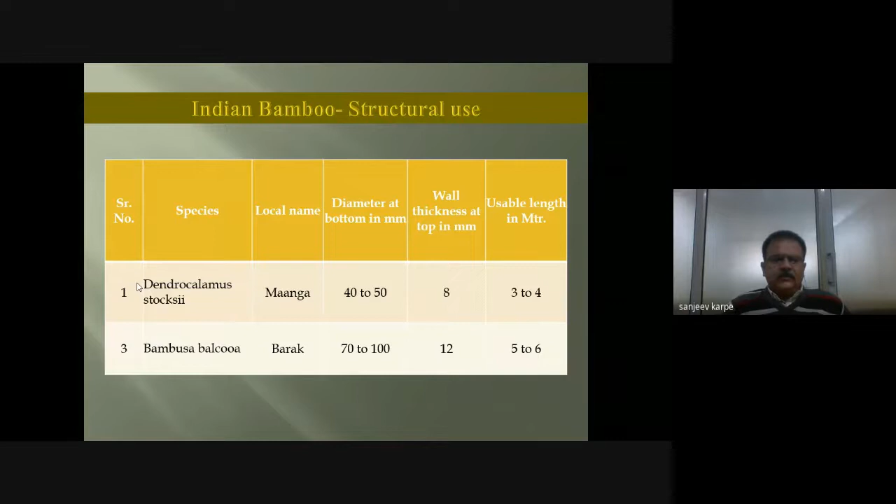So I will talk about these two particular species selected for construction and share our experience. Dendrocalamus stocksii is a fairly straight, good looking bamboo, solid at the bottom up to 2 to 3 feet, with usable length not more than 4 meters and diameter 40 to 50 mm. Bambusa balcooa has good diameter and wall thickness; it's not so straight, but with proper segregation you can sort out straighter poles for construction.

The first important thing about bamboo construction is grading of the material, because you need graded raw material for structural use. If you want good quality bamboo construction of international class, you should do grading, since not all bamboo is suitable for construction. Grading is done with respect to species—here I'm talking about Stocksii and Balcooa.

The age at which you cut bamboo is also most important. The age should be between 3 to 4 years. Diameter at the bottom should be minimum 45 mm and not less than that, and diameter at the top should be minimum 35 mm. Usable length should also be minimum 4 meters. Taper is also important—maximum 4 mm per meter length of taper is allowed.

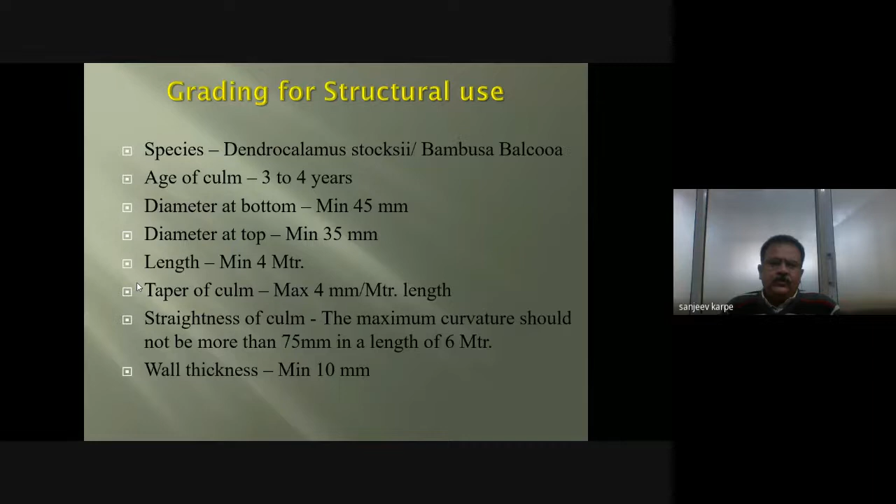If tapering is more, there are some limitations. Straightness is also very much important—maximum curvature should not be more than 75 mm in a length of 6 meters, and minimum wall thickness should be 10 mm. This is the basic specification on the basis of which you need to do grading before using bamboo for any good quality construction.

But once the same bamboo is dried, it's not possible to segregate it age-wise. So the most important thing is you need to segregate bamboo by age while it is still in green form.

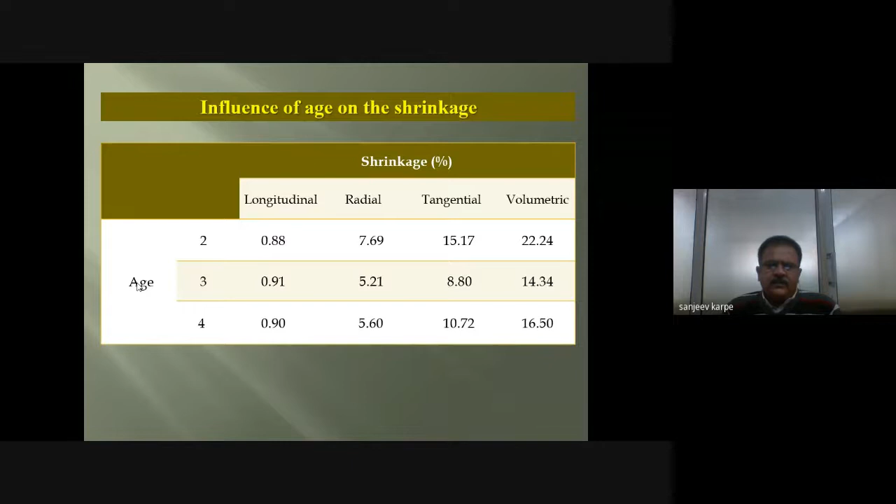About shrinkage—longitudinal shrinkage, radial shrinkage, tangential shrinkage, and volumetric shrinkage—you can see in this slide how shrinkage changes with age. So the influence of age on shrinkage is also very much important.

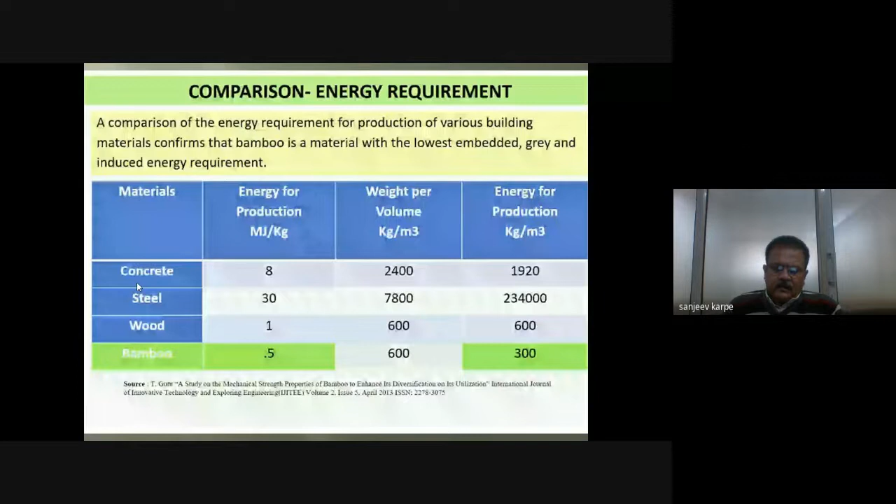Now, why bamboo? Because bamboo is one of the most sustainable materials on earth—you can call it a champion of sustainability. When we talk about energy for production and compare it with concrete, steel, and wood—energy for production, weight per volume, and energy for production per kg per meter cube—bamboo is the best bet, and compared with steel, it's a vast difference.

Species for bamboo construction: the IS code has included 16 species.

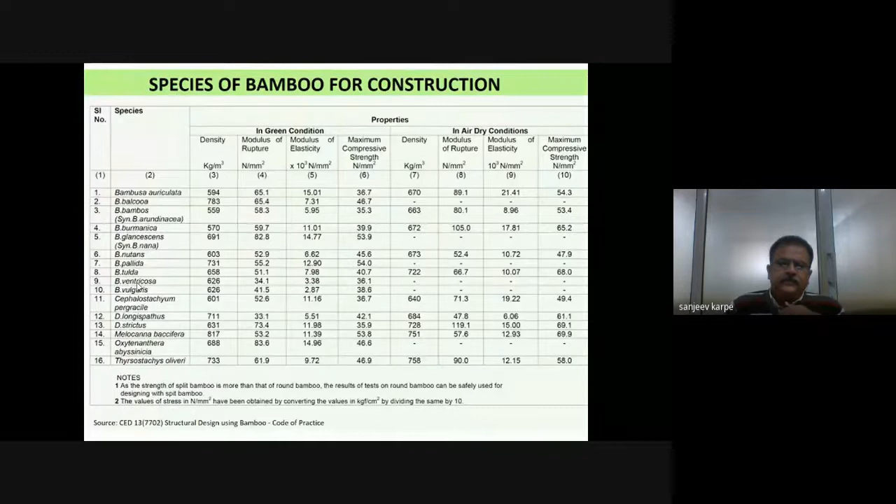About durability, bamboo on its own is not a durable material. You need to treat this material, and pressure treatment is the only reliable method where controlling quality is possible.

Bamboo consists of a lot of starch and sugar, and as long as starch and sugar is inside, some insect will come and eat it. Insects like borer lay eggs inside the bamboo even before you harvest it, so your enemy is sitting inside. The borer has a fantastic capacity to remain in a dormant stage for a long period, and hence you need to take care of your enemy by impregnating preservative inside.

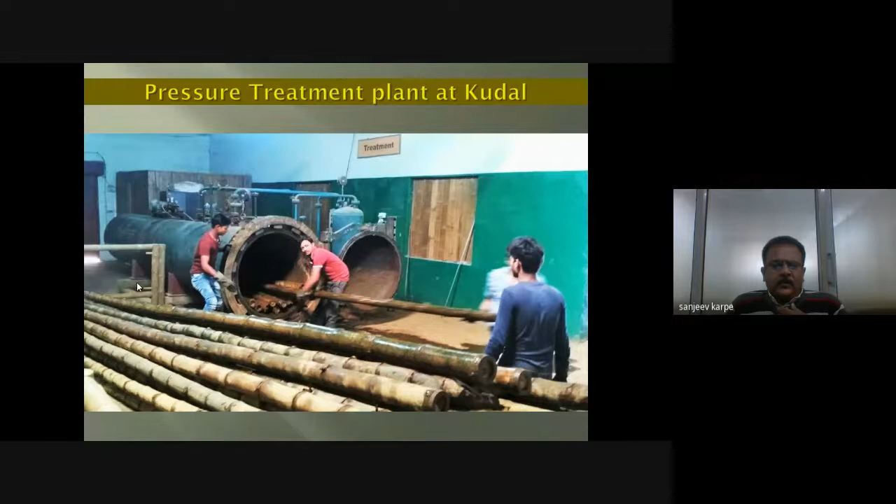Bamboo is a bundle of capillaries, and capillaries start collapsing within 72 hours of harvesting. So when capillaries are open, putting preservative inside is easy, but once capillaries start collapsing, you need some pressure to open them up. Pressure treatment plant is the method by which you can do it irrespective of when the bamboo is harvested.

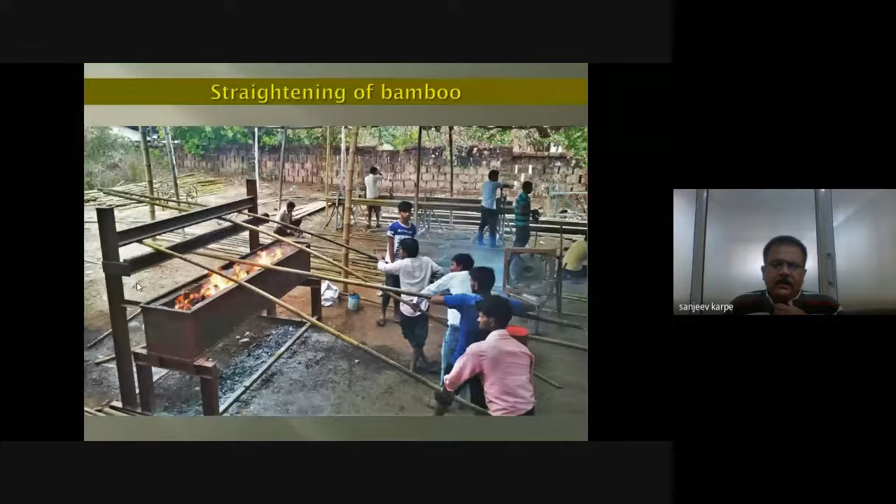Because we don't have much straight bamboo, straightening is very important. Heating and straightening using heat is the simplest and cheapest method available, but this needs skill. We have trained our artisans to straighten the bamboo as straight as a pipe. This needs very high skilled manpower and takes a lot of time, but making bamboo as straight as a pipe is absolutely possible.

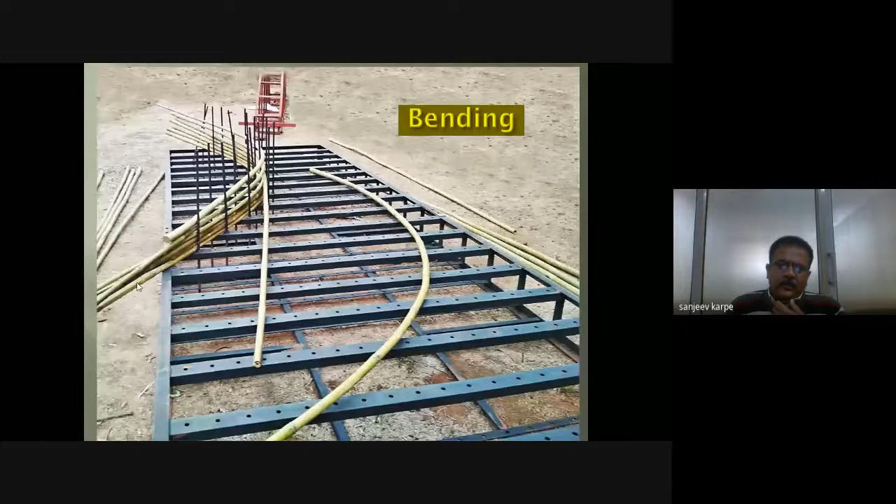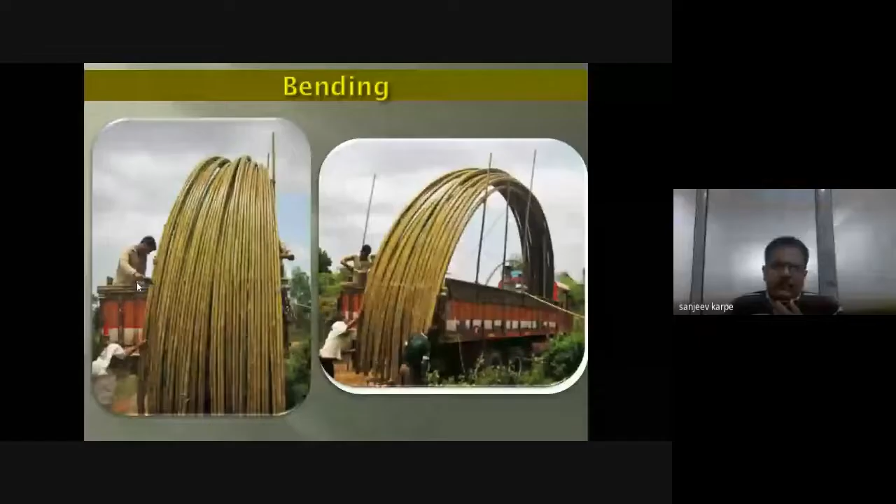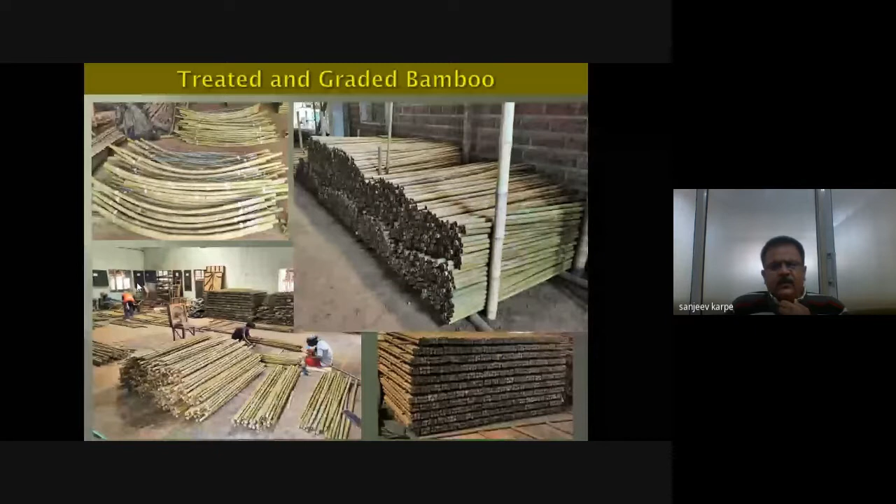We have converted bamboo into a commodity now. Treated and graded bamboo, any size, any shape, we are making it available to customers who want to make a product out of bamboo. We are trying to bring in this culture of converting bamboo into a commodity - uniform or straight, all the bent bamboo, all these things are available in our facility.

Now let's come to the construction part of this. When we talk about bamboo construction, let's start with the foundation. There are multiple options for using bamboo in a foundation.

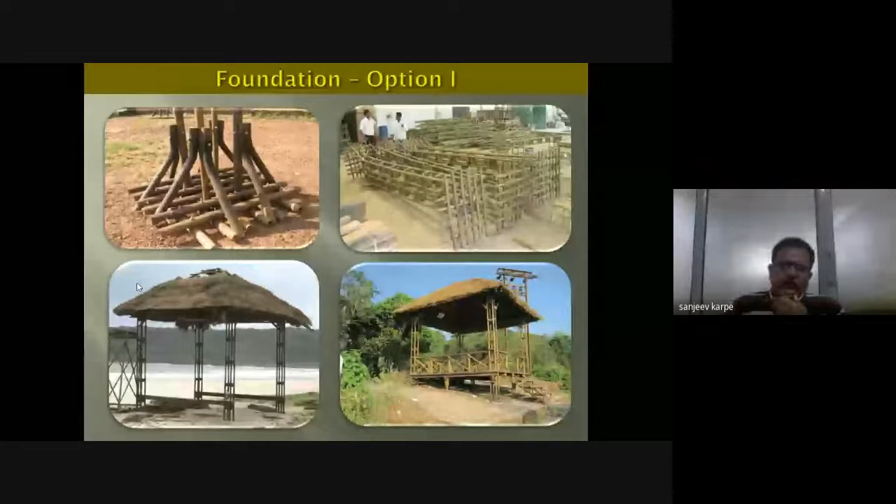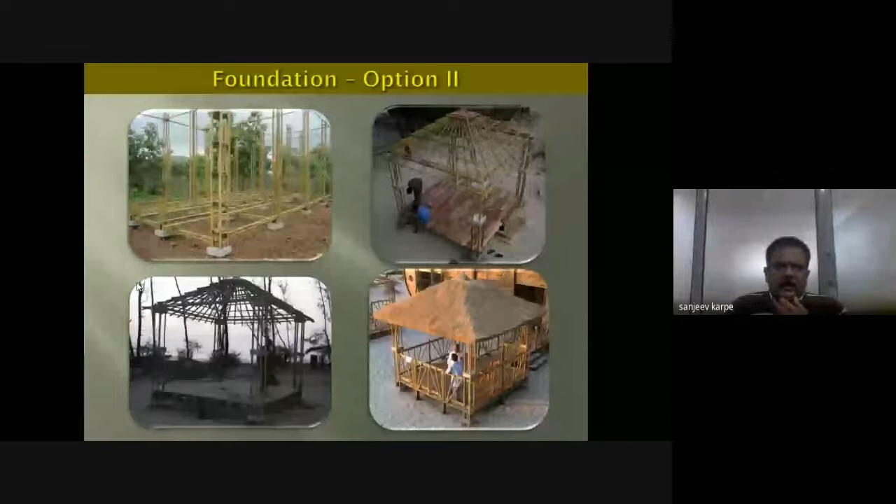These are pictures where you see bamboo directly used with stainless steel studs as a fixing material - this is the first option. The second option is a ferrocement band, which has been used to put bamboos together, and this method is developed by IIT Delhi.

Then you can embed bamboo directly into the concrete, but for that you need to make the bamboo water repellent - that particular part which goes inside the concrete - and the hot and cold creosote method can be used to make bamboo water repellent before embedding it directly into the concrete.

This is one more method for foundation. These T-shaped plates are fixed on the plinth band, the RCC plinth band, and on that plate, using nut and bolt, you can fix the bamboo column. So this is one more method of doing the foundation.

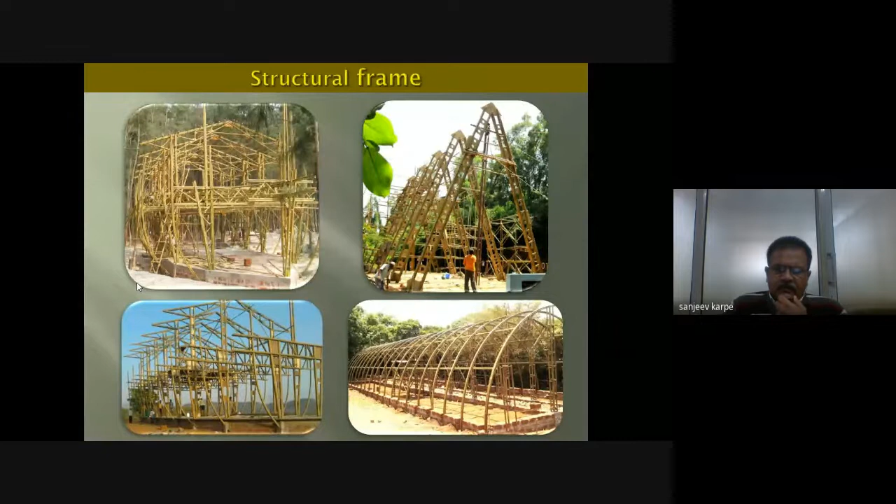For the structural frame, you'll see here the complete bamboo structural frame - we normally use a complete bamboo structural frame like this. For walls, there are multiple ways you can use half-cut bamboo, and for walls you can also use flattened bamboo.

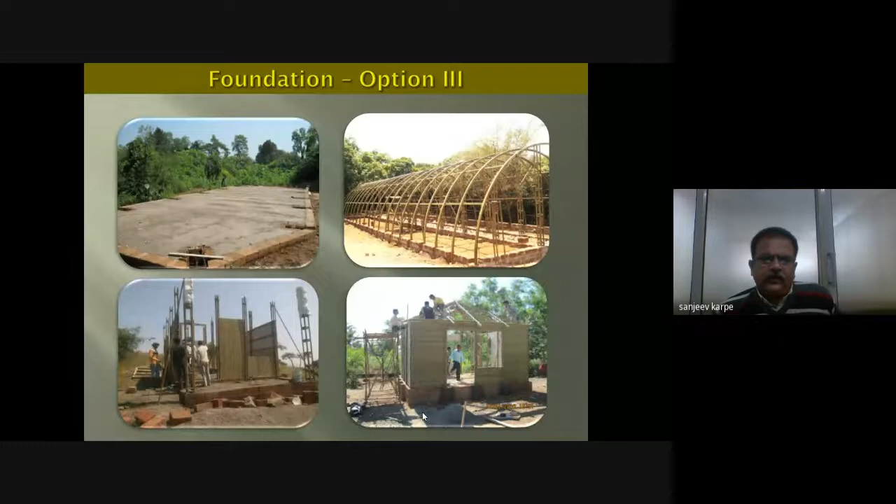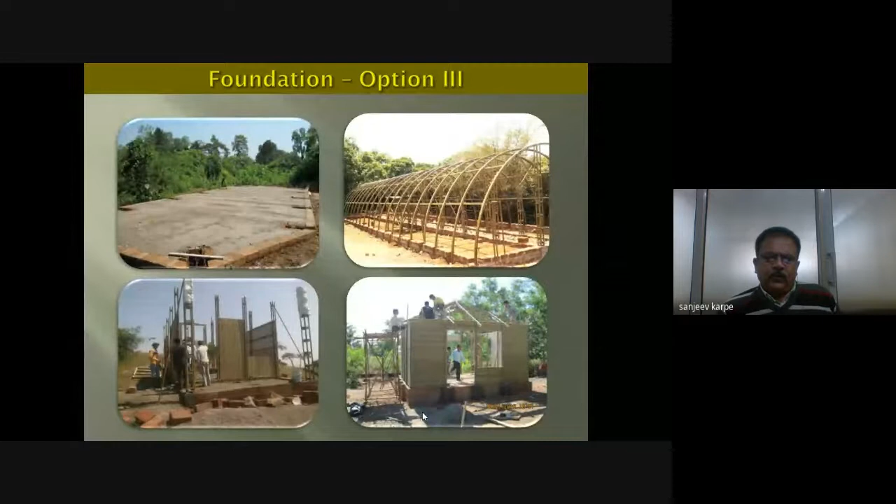So talking again about the foundation - if you want to embed bamboo directly into the concrete, you need to, after doing a preservative treatment, make that part of the bamboo which is going into the concrete water repellent. For that, you can use the hot and cold creosote method to make that bamboo portion completely water repellent.

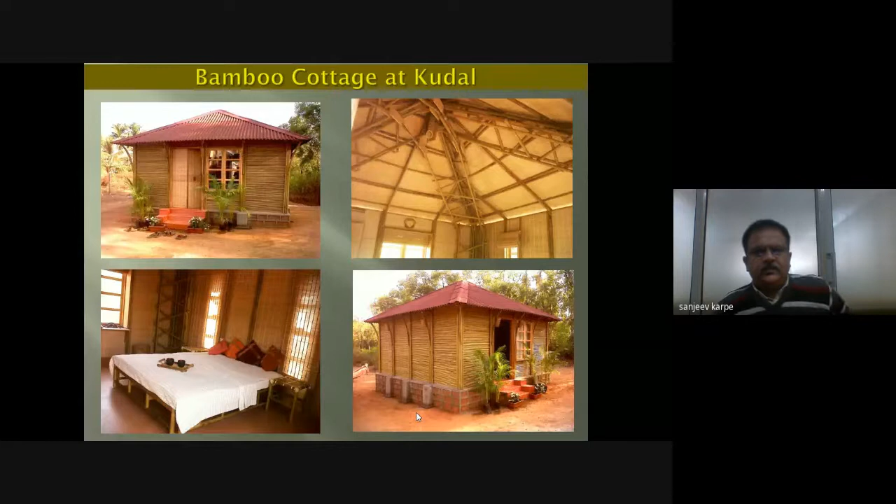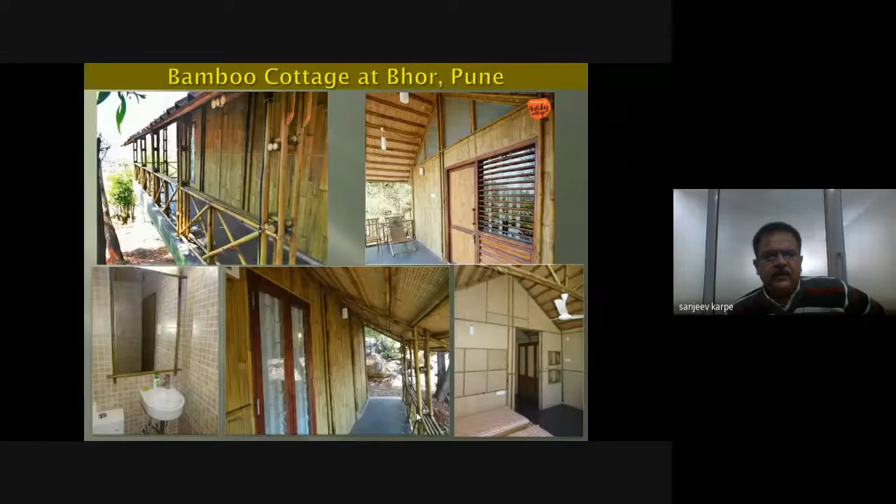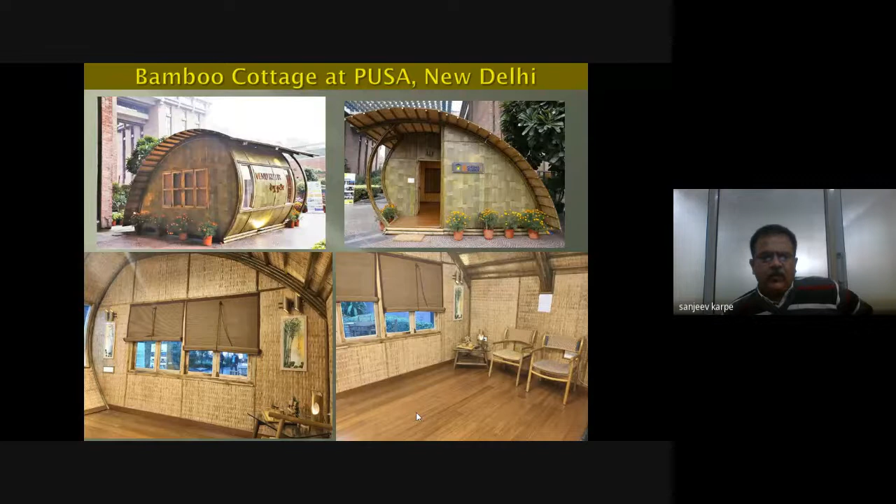Another way of doing foundation is... So we started doing this type of cottages, keeping in mind that the bamboo structure should be aesthetical, beautiful, and durable. Typically when you go abroad you see very nice bamboo construction, but in India we normally don't do this type of structure. So we thought let's create an aesthetical, beautiful, durable structure, so that more and more people want to do elite structures in bamboo, and the profile of bamboo will change.

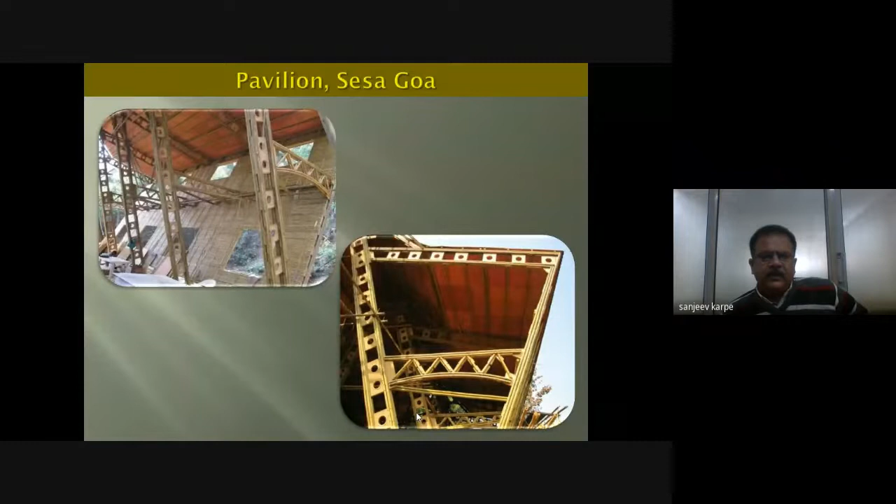These are the construction components which we make, and we started doing bigger structures - this is a structure which we did around 12 years back in Goa.

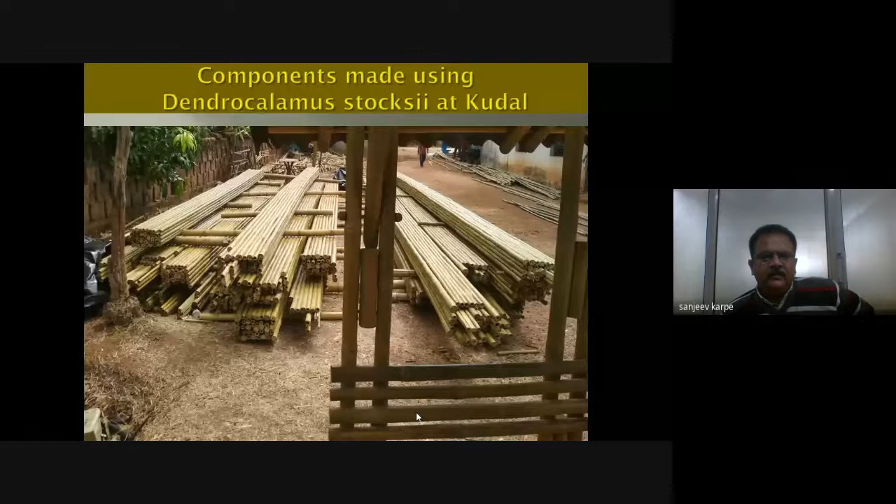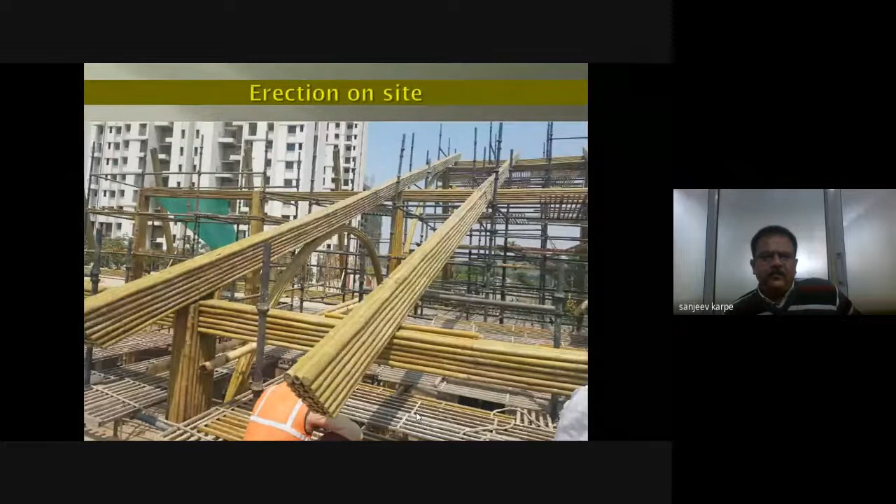Then we set up a facility where all the components are made like this in a factory, and then they're packed and, through a longer trailer of say 40 feet long, we take this material to the site where actual erection is done, and you will see the straightness and uniformity which our artisans were able to achieve.

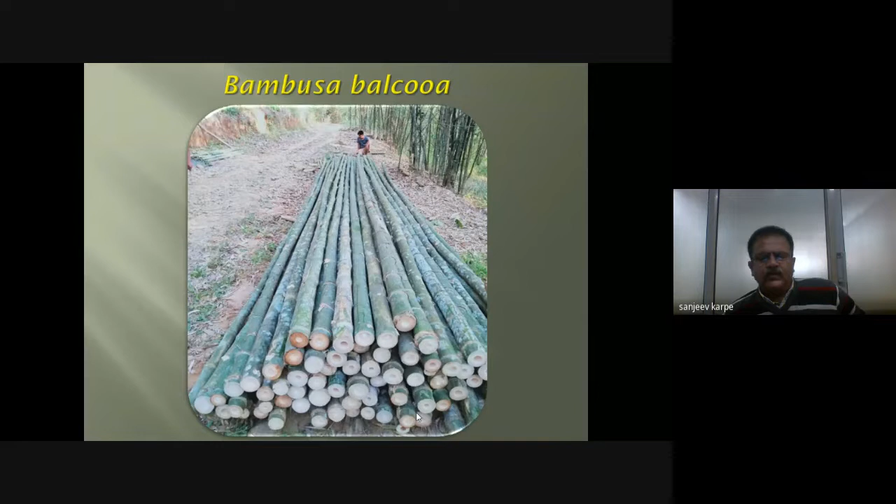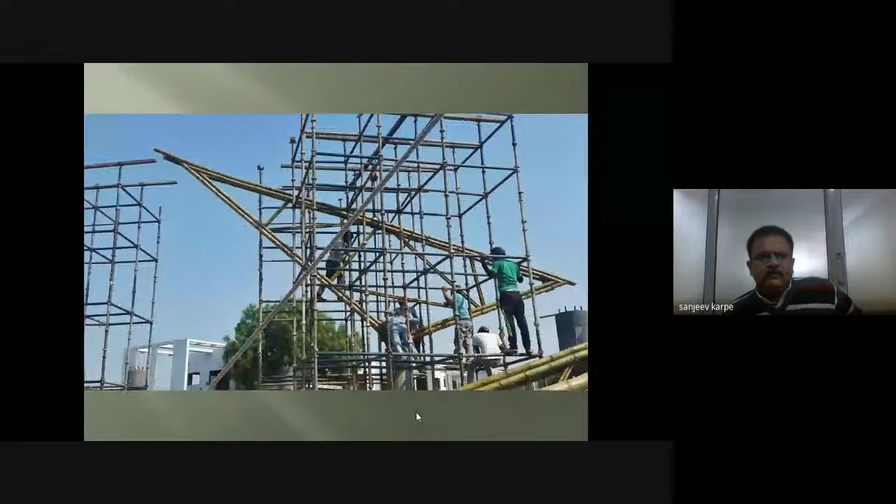When we slowly started using Bambusa balcooa, which is a bigger diameter bamboo, around 4-inch dia, 100mm, this is how we convert that bamboo into the component on site, and this is how we do the actual erection of components on site. This gives us confidence that yes, bigger structures also can be made with bamboo.

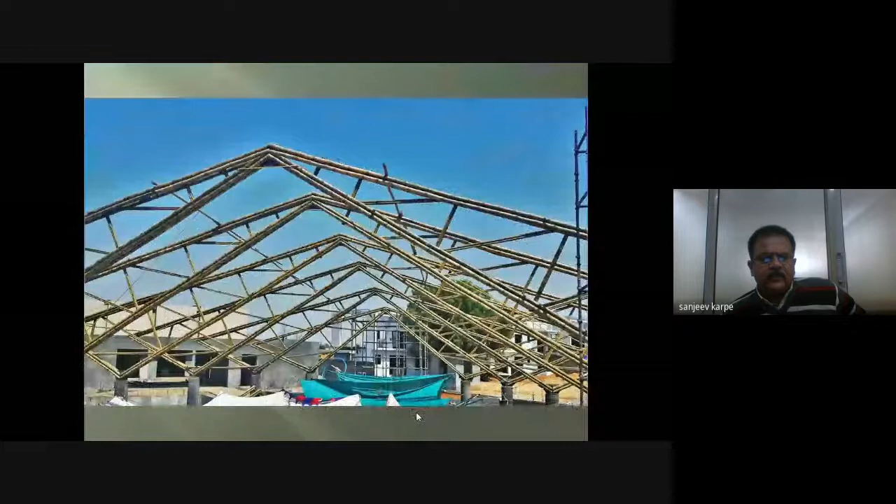This is the structure which we did, having 10,800 square feet of area, 62 feet of span. This is a structure which we did for one builder, Organo, in Hyderabad. This is a clubhouse for one eco-friendly villa project. And once we completed this, we got confidence that yes, we can do bigger structures also.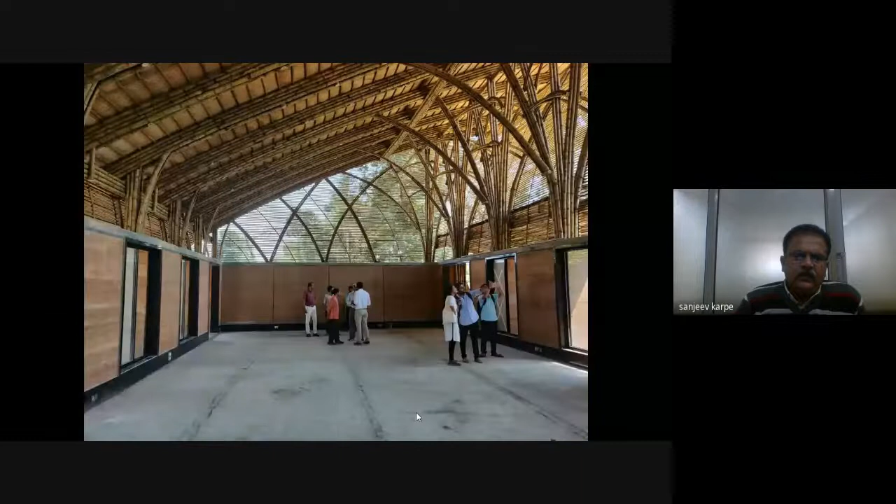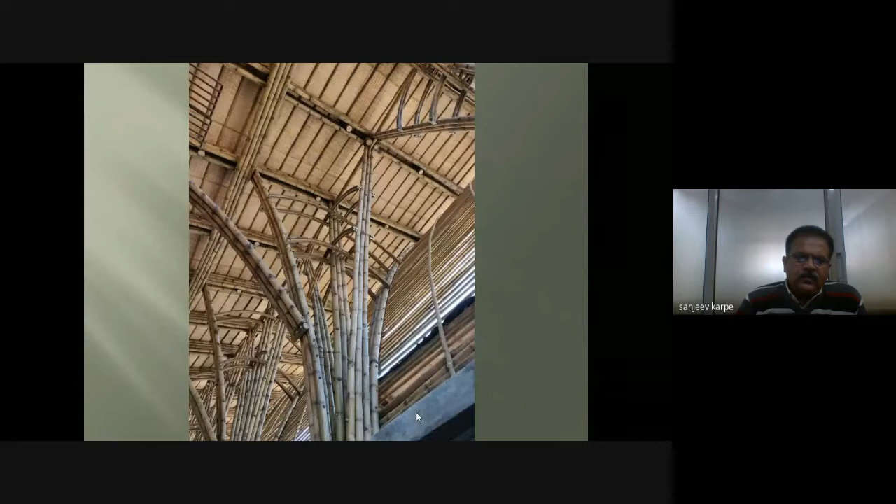Then the government of Maharashtra gave us opportunity to work for the forest department in Chandrapur near Nagpur, in the BRTC, Bamboo Research and Training Center, a Forest Department project. We constructed this structure where 4-inch diameter Balcooa is used, and for purlins, Stocksii is used. This was a very good experience where we understood the nitty-gritties of this, and then we started doing bigger buildings in bamboo as per the client's requirement.

We need to understand that this is a government's project. You need to have a schedule of rates, you need to have rate analysis, third-party testing, and all this we were able to achieve.

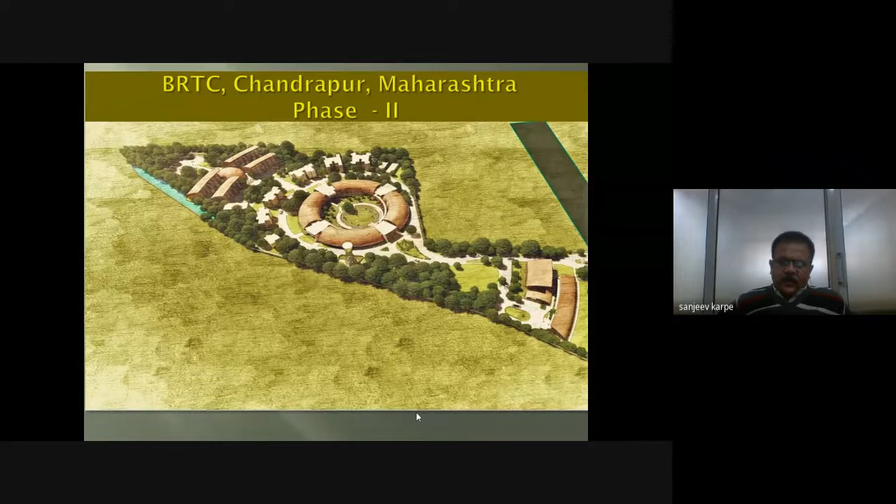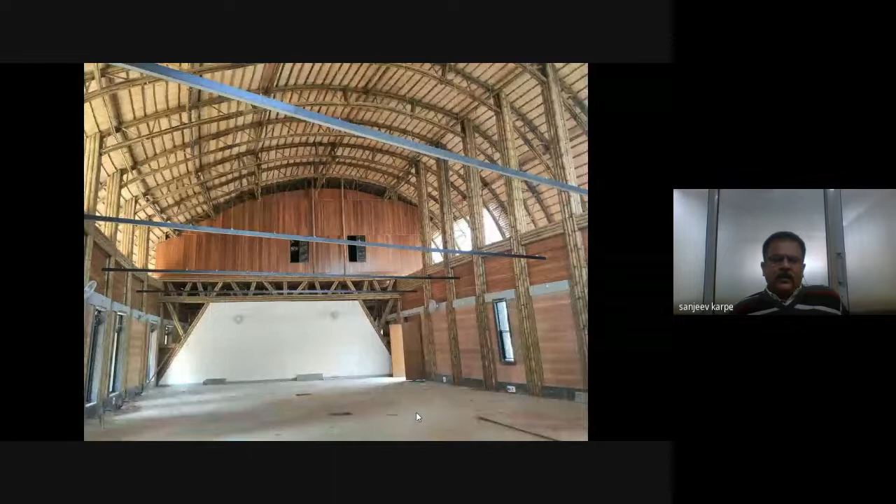Then the government gave us a second project where 1 lakh square feet of construction was to be done for the forest department again in the same campus, which we completed, 1 lakh square feet for a research institute of the forest department, and right from flooring to roofing, bamboo is used. After completion of this work, PWD Maharashtra has included 12 items of modern bamboo construction into their SSR, and now I'm very sure other states and state PWDs will also include this, because bamboo is already there in their SSR, but that is not modern bamboo construction.

The rates and specifications for the product which are there in bamboo are of very mediocre buildings, and now the government of Maharashtra has taken the lead in this.

We got an opportunity to work abroad also. We worked for Hilton Hotels, one of the largest hotel groups in the world, and Waldorf Astoria is the high-end brand of Hilton Hotel. At Maldives on Ithaafushi Island, Waldorf Astoria was making this resort, and they wanted the complete restaurant to be done in bamboo. It was a tender. We participated; the competition was from China, Vietnam, Indonesia, but we were able to beat all of them.

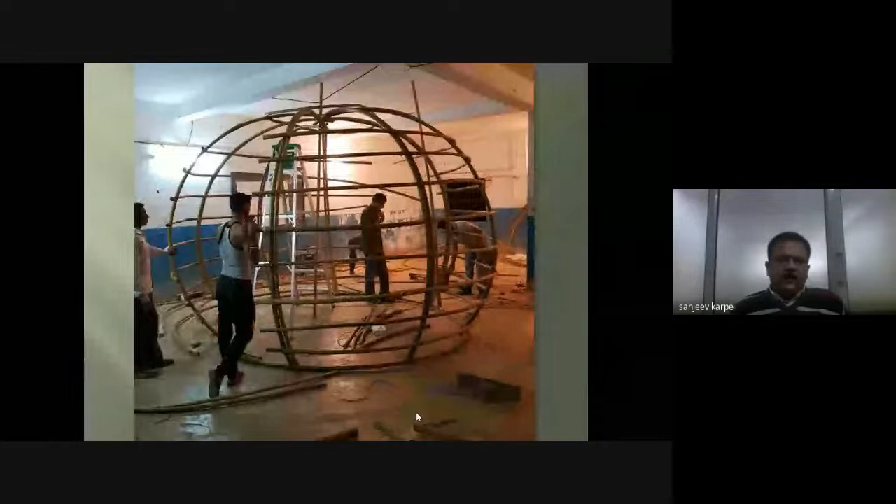And get this job. We fabricated components for the job and tried some assembly in our factory, and this particular restaurant is being used by Waldorf Astoria, a very high-end brand of Hilton. The room rent in this resort ranges from 5 lakh to 10 lakh rupees a room night.

This has 500 people sitting capacity, and we did this complete work in a pre-engineered, prefabricated style where you don't have to do much, just assembling on site. This is the component which we made in our factory at Kudal, and this component is taken to the site, fully finished, and this is how we build the structure on site.

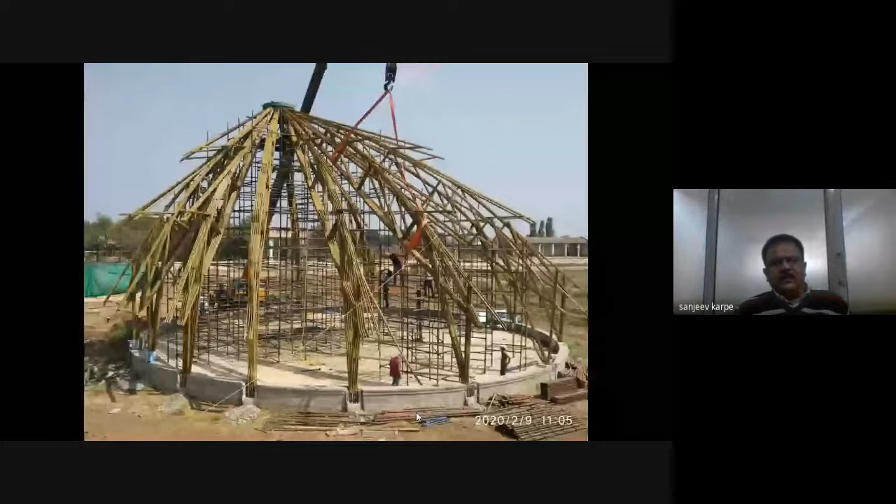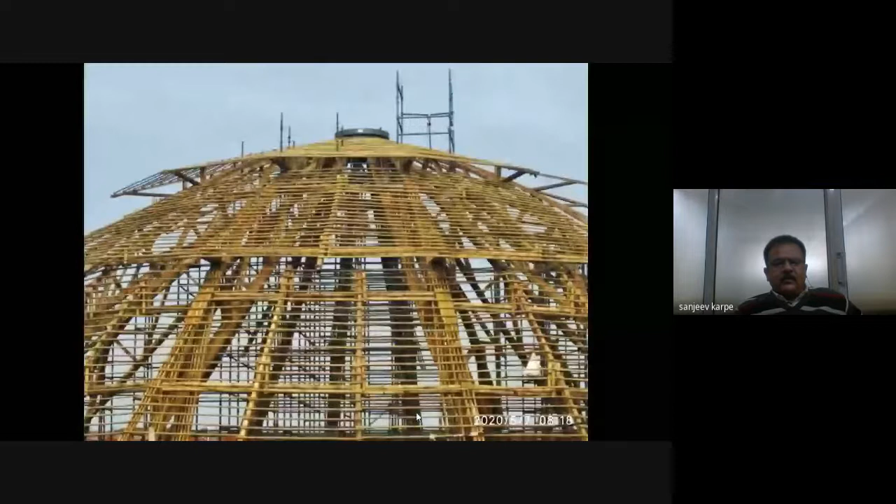To erect this complete skeleton of a building, which is 6,800 square feet of area, it took only 10 days. This is a new avenue coming up where you can actually start doing pre-engineered, prefabricated type of bamboo construction, and this gives us opportunity to work anywhere in India and abroad, doing most of the work in the factory and going to erect it on site.

I'm very sure that with this new opportunity, many more people will come forward and start doing this type of work in our country, and India can be a leading player in bamboo construction.